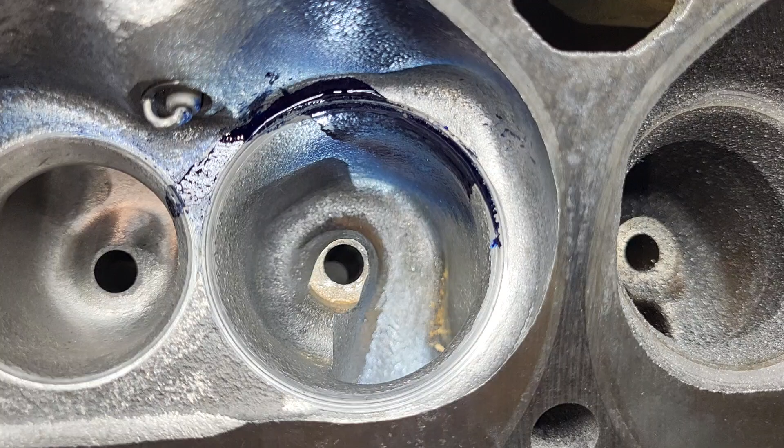Alright guys, I forget even which cut this is. What I did this time is I did some work to that swirl ramp. See how that's leaned over quite a bit? Now I did move it, but I didn't move it a huge amount because I wanted to see if there would be incremental gains. What I'm hoping for is, because the short side gets a little wider, right? That'll counteract our swirl a little bit, and it'll flow a little easier because we had high-speed air on that side.

So, as far as our liquid, it's wide, it's got splatters, it hits that chamber, it goes right across, it gets sucked down the exhaust and the overlap, it goes all the way to the other side. Let's see what that exhaust valve looks like. I should have taken a look at this before I pulled it apart, but that's what the liquid looks like right across the exhaust valve.

Okay, we've got about the widest path of liquid across the valve I've seen to date. Literally, it goes from all the way over here to all the way over here. I would think that would be good. I mean, we have liquid all the way over to here on the seat. Right? Now, of course, our Dykem is much heavier than fuel, so if you do good with the Dykem, I think you'll do excellent with the fuel. Just my opinion, which means nothing.

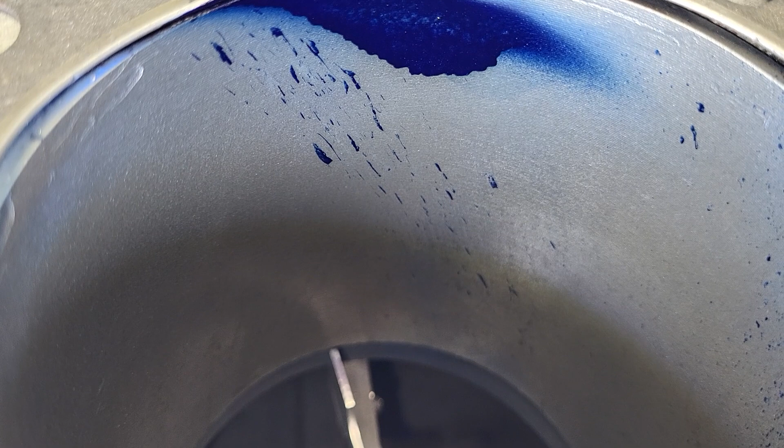Okay, our liquid does look a little bit different. Not necessarily better or worse. I'm gonna speculate and say it's not quite as good as the last time. But if we have an increase in airflow, it may be worth it. So let's see how this video develops.

Okay, that's where your short side is operating at now. You can see I did put a very fast polish on it. You can see on the left side it's been brought over quite a bit. I did try to sonic that swirl vane. Looks like it's got a lot of cast iron on it. I will probably push my luck on that until we break through, because that's what this head is for.

And if we keep getting flow gains, that's where we're going to be doing a lot of work to this little short side here and getting what we can across the short side, because we have more swirl than we need as far as I'm concerned. You can give me your opinion on that, guys.

Okay, you can see I haven't gone crazy on this bowl yet. There's still some spots that haven't even been touched. On that bolt boss that comes through, that has had some metal removed, but there's still 100 thousandths of metal there that can come off before I even break through. But I'm not worrying about that right now, because the air speeds are higher on the other side of that roof. So I'm working on the higher speeds first.

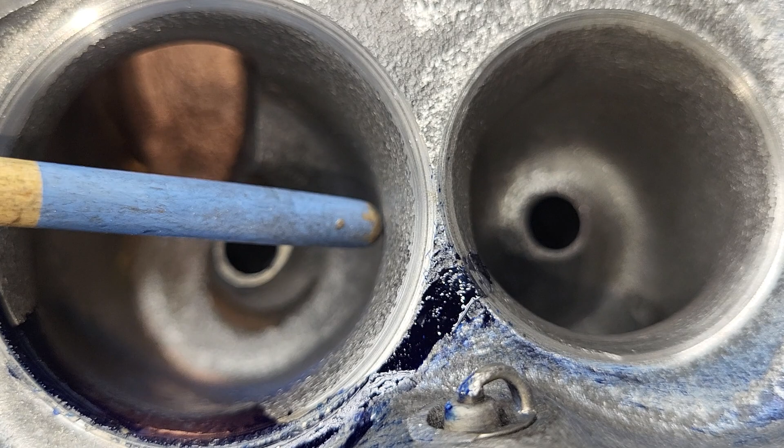This bowl did get thin right about here. Now, I don't know if you guys can see it, but that's got a very nice, generous radius out. And you're going to have to keep that. If you put a big valve in this, it's not necessarily detrimental. I mean, I know a lot of guys bring it almost all the way out to the 60 and run it straight up. These, you'd have to put more of an angle on this wall and flare it out.

This side looks like there's more metal that can come straighter out, and the short side looks like there's a lot of metal. Looks like that can come straighter out. But in between the valves here, this is solid, and then it gets hollow. And we're down to about 100 thousandths in one spot, which isn't bad. It's usable. Remember, this is going to be for a drag race engine. I'm not afraid to push them to 100 on a drag race engine, even though there's an exhaust port on the other side.

Okay, the exhaust bowl got a little bit of work. I took some metal out of both sides of the bowl and the port all the way out. Let's take a look. Okay, you can still see a little bit of the paste ooze line on both sides, but it was made quite a bit wider.

It's still very, very thick, and we can get probably a lot more out of this exhaust if we need it. At the end of the video, if you don't like where the exhaust is, you let me know. We'll do some more work to that. Remember, we're going to try to get some RPM out of this thing, because a 9-second quarter mile is not going to be easy with these heads, so we need every advantage we can get.

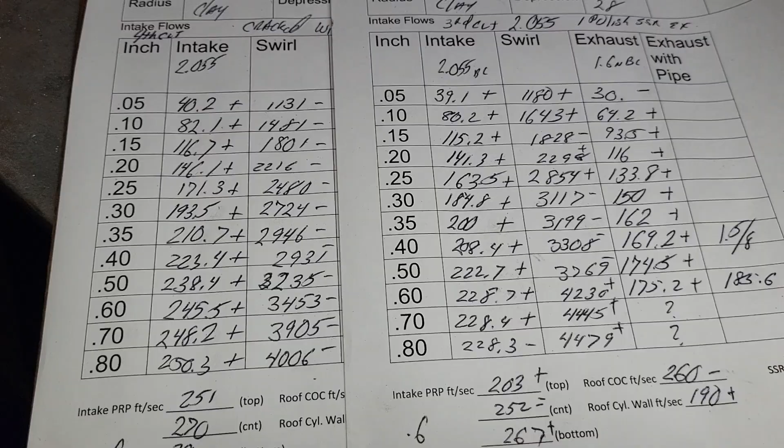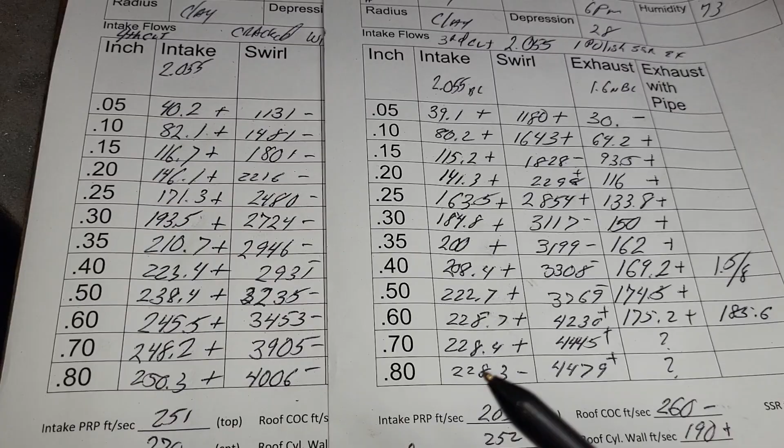Okay, this is our fourth cut, which is the cracked head. It's got a wider short side radius with a slight polish, and the exhaust port is widened. So, these pluses and minuses are in reference to our last cut. How'd we do? Well, according to this, it seems to have liked it, and it seems to have liked it a lot. I mean, take a look at 600.

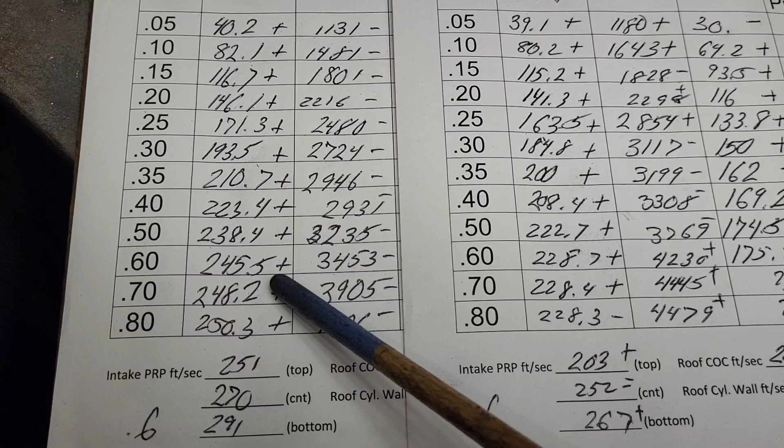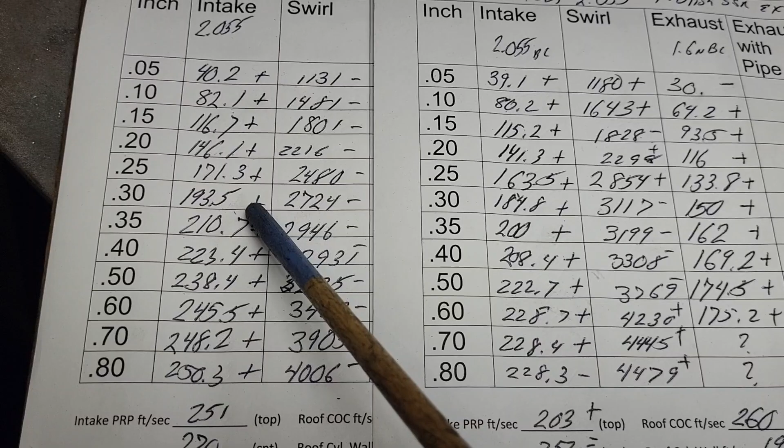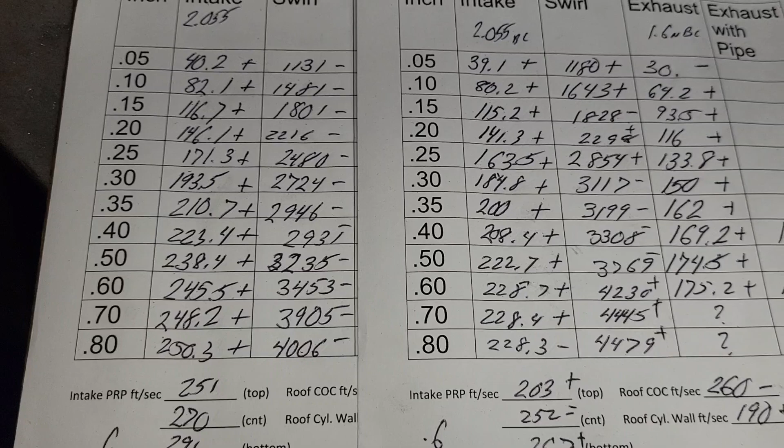We went from 228 to 245. That is a huge jump with such a small mod. Huge. And it works from all the way down low, all the way up. Take a look at 300, how much we gained. 184 to 193.5, almost 10 at 300. You guys need to calculate how much power we can make out of this with a decent size hot cam. Of course, you'll need the exhaust flows, but we'll get into that in a minute.

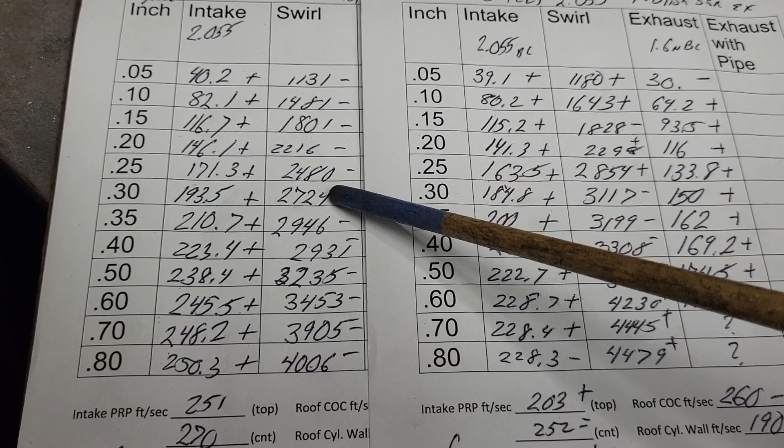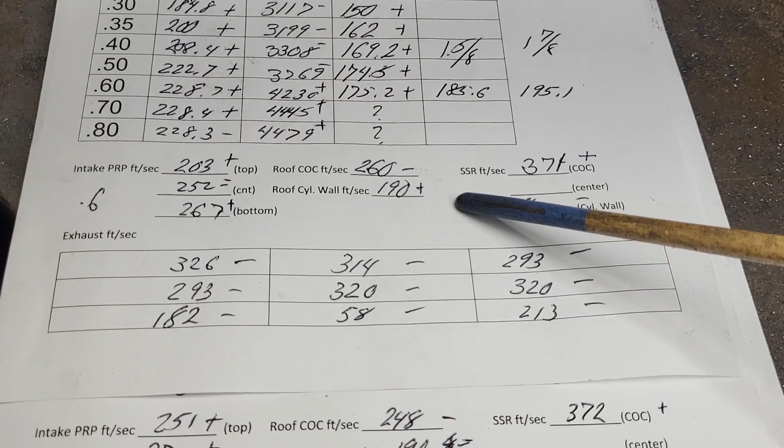Take a look at our swirl. Now, what did I say? I said if we put more across the short side, it would reduce our swirl. So what do we got? Looks like I was pretty close to being right on that, right? Okay, let's take a look at our airspeeds for the intake port. Okay, airspeeds. Third cut. Fourth cut.

Notice the pinch started to come alive, right? Quite a bit more action on the top of the pinch. Still not over 300. It's not holding us back. Remember, all I did was round that side and take some metal out of it. I have not taken anything out of the divided wall between the two ports yet. So we could get bigger on that. But you have to remember, these already start out as relatively big openings.

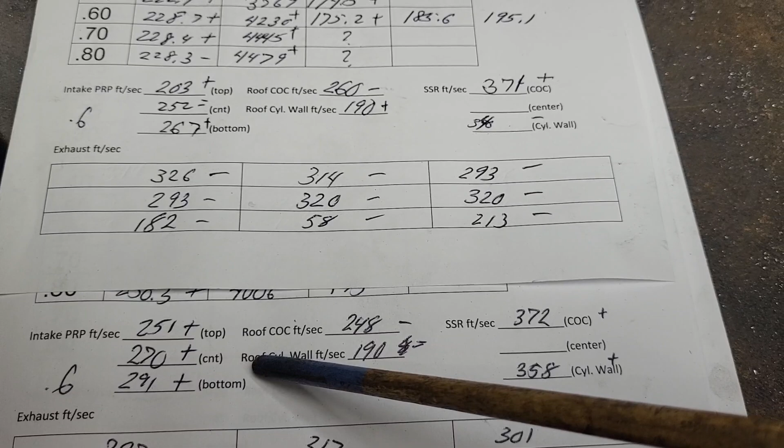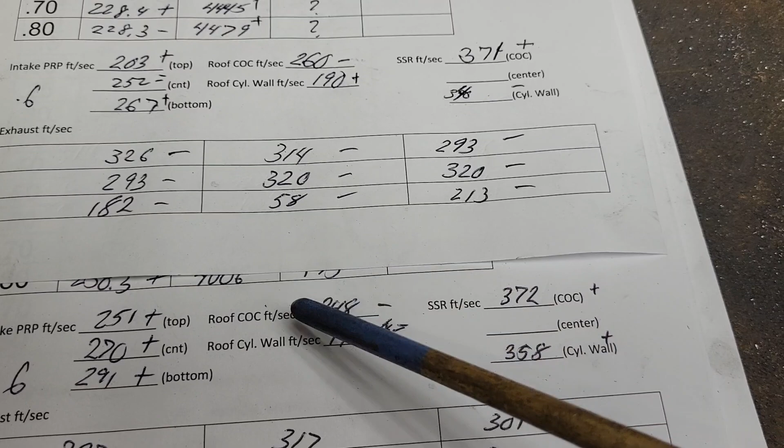They're really like a 205 medium race port gasket size, which is fine, because if we use the big bow tie, that works out really well. We may even go to a 206. I don't know. Maybe. We'll think. All right, take a look at center of the cylinder here. Center of the cylinder dropped speed because we're getting more across that short side, right?

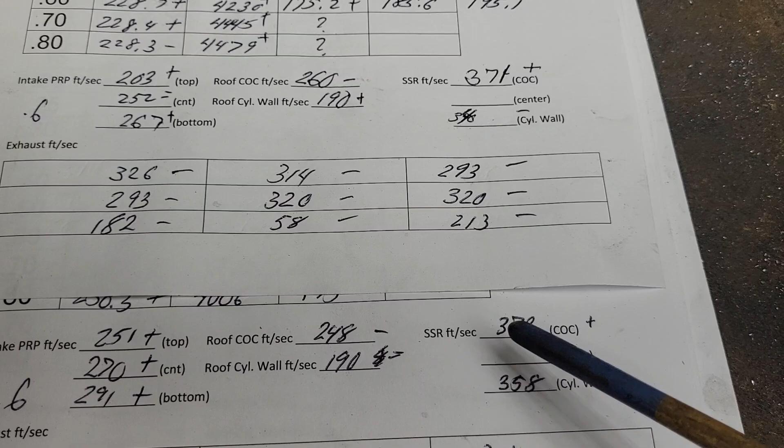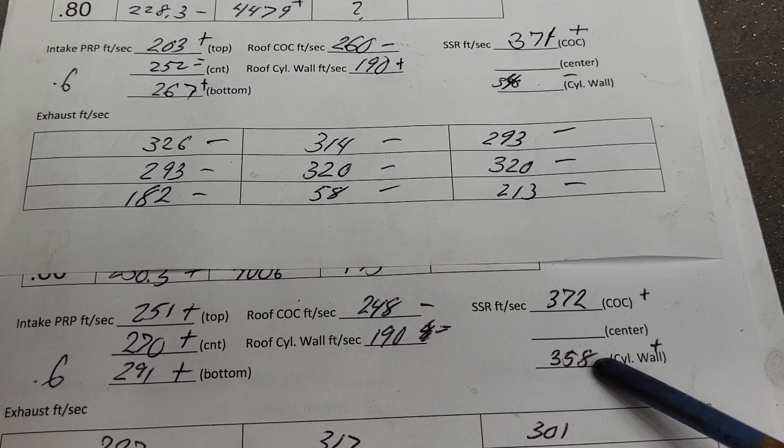The other side of the roof stayed exactly the same. As far as, I'm sorry, yeah, right, okay. These stayed almost exactly the same, went up one number, and this went up a little bit more, went from 340 to 358, okay? Overall, these speeds really didn't change a whole lot for the amount of flow we increased. So it's happier where it is.

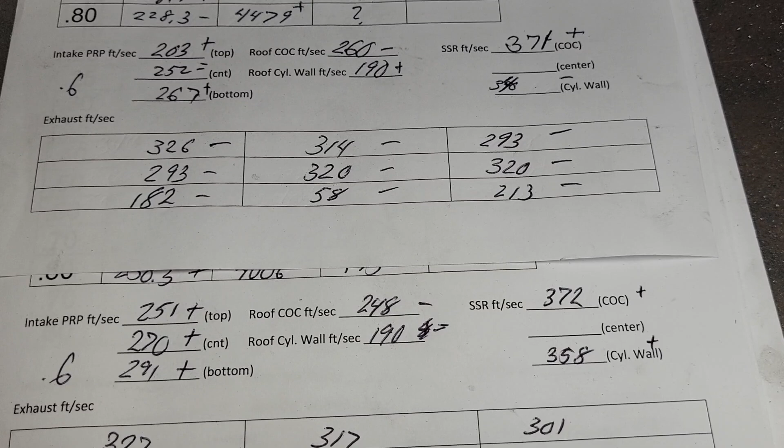So what I will probably do is, I think I'm going to do the exact same thing, but get into it a little bit more. I think there's probably a little bit more left in removing more of that ramp and extending that short side. I do have to get in there with the Sonic and take a really good look before I do it, but I think there's a lot of metal there. So if I can move that over some more, I will.

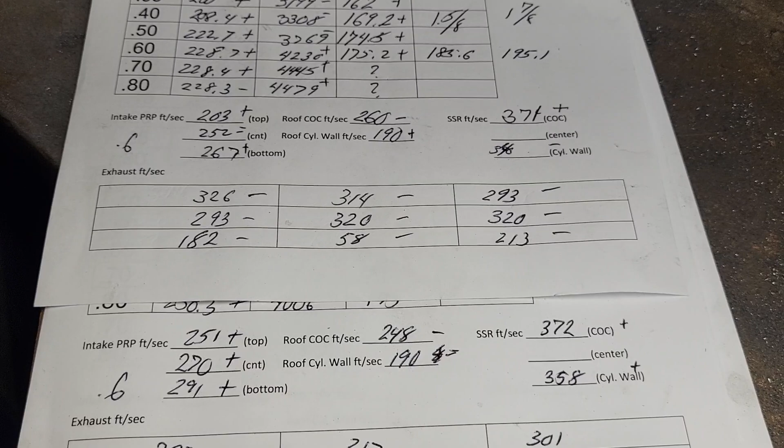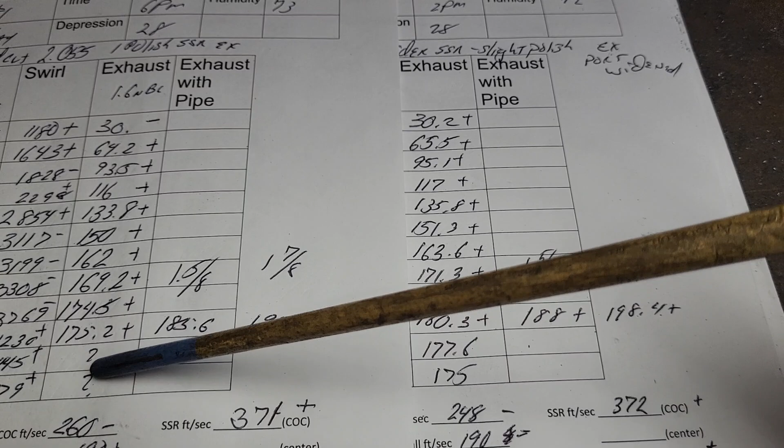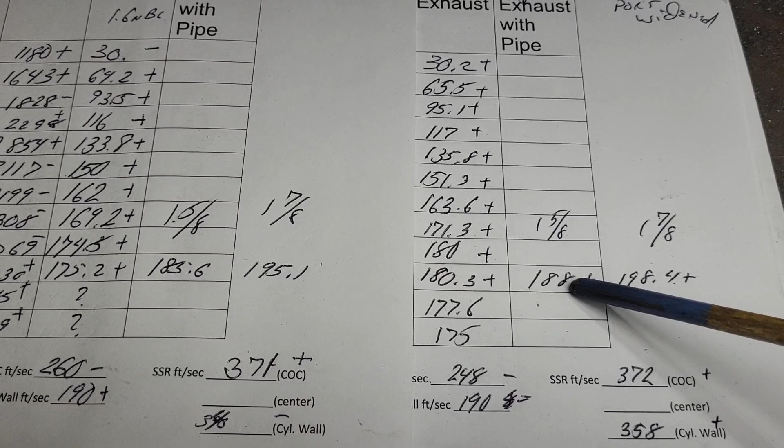Now let's take a look at our exhaust. Okay, third cut, fourth cut. These pluses and minuses are in reference to this. I goofed over here. I forgot to do these two higher ones, but I did them over here. How'd we do? All pluses, but it doesn't keep going up, so it could use some more work. Okay? We top out at 180.3 with a 1 5/8 pipe. We go 188. We're 198.4 with a 1 7/8 pipe.

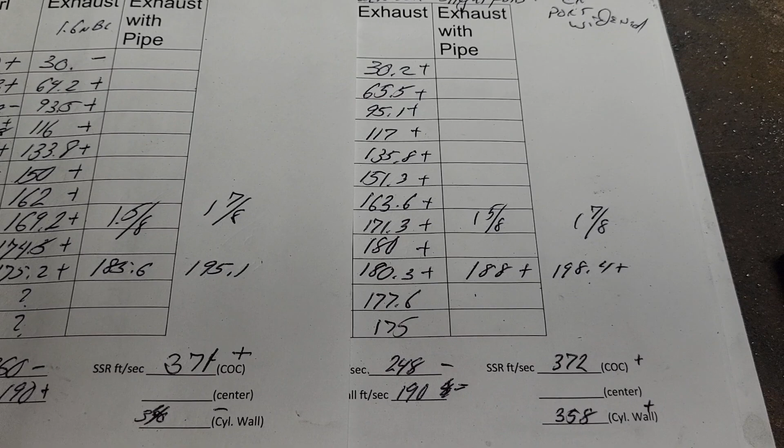In reality, we could probably get it done where it is if I can bring the intake port up a little more. Give me your opinion on that, guys. Now let's check our airspeeds. Remember, this is a bigger port, so the gains that it gets are not really huge gains. So you need to think about that.

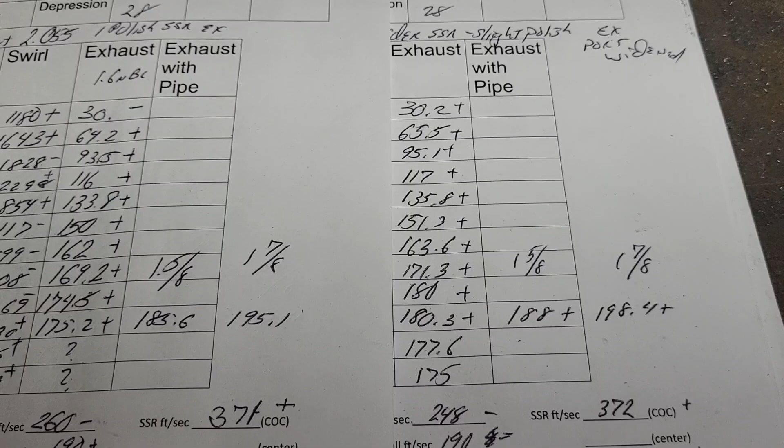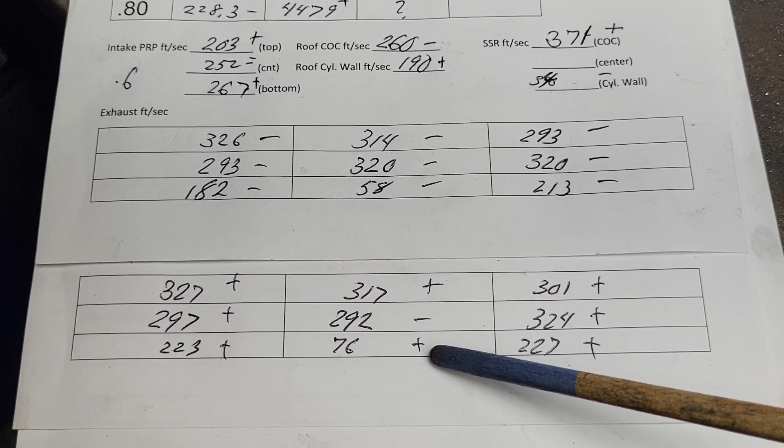Okay, these are third cut airspeeds. These are fourth cut airspeeds. So these pluses and minuses are in reference to these. How do we do? Plus, plus, plus, plus, minus, plus, plus, plus, plus. It looks happier. How is it from side to side? Not bad. Not bad. These are actually like opposite, right?

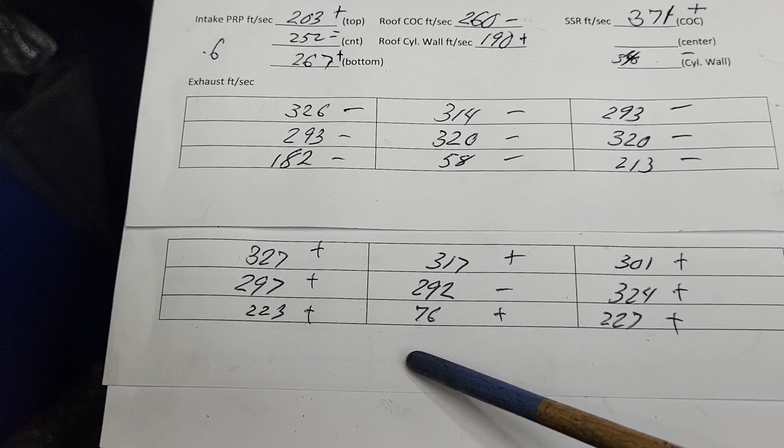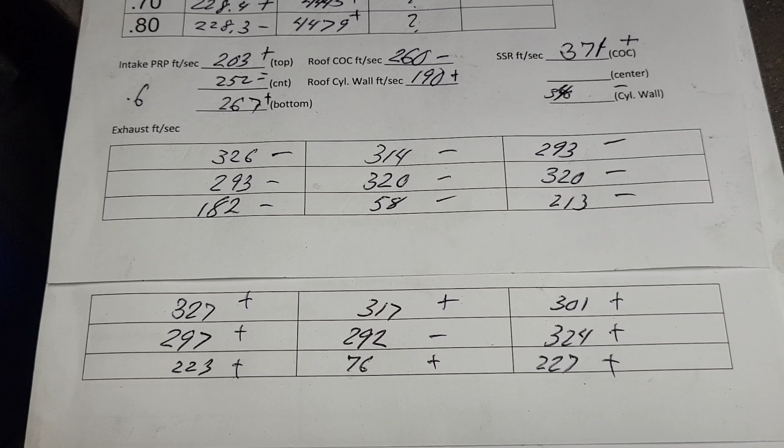And side to side on the floor is really good. Still pretty much dead in the middle here. Okay, very, very even. Tough to get a measurement. But it's using the whole rest of that port really well. What is the next game plan for this? Well, I'm going to have to think about that. I'm going to have to use the Sonic and see if I can see what to do.

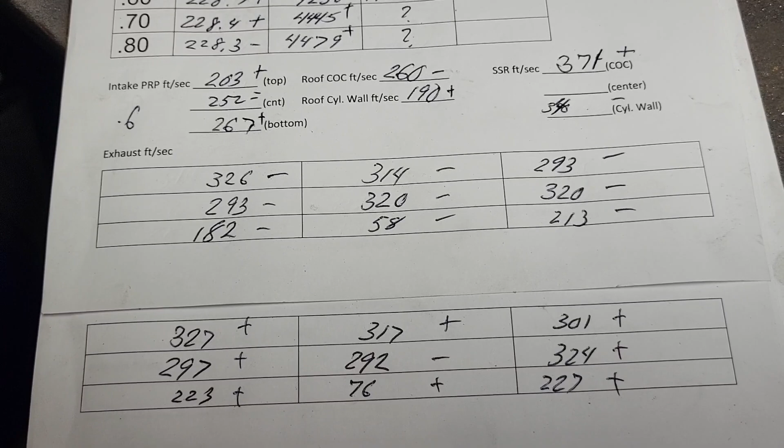I think I may raise the roof a touch. Well, there's plenty of metal on those. I could probably raise them 100 thousandths, which is probably in the cards for this build. I may Sonic the roof and see what we can do on the roof. I think that's what I'm going to do.